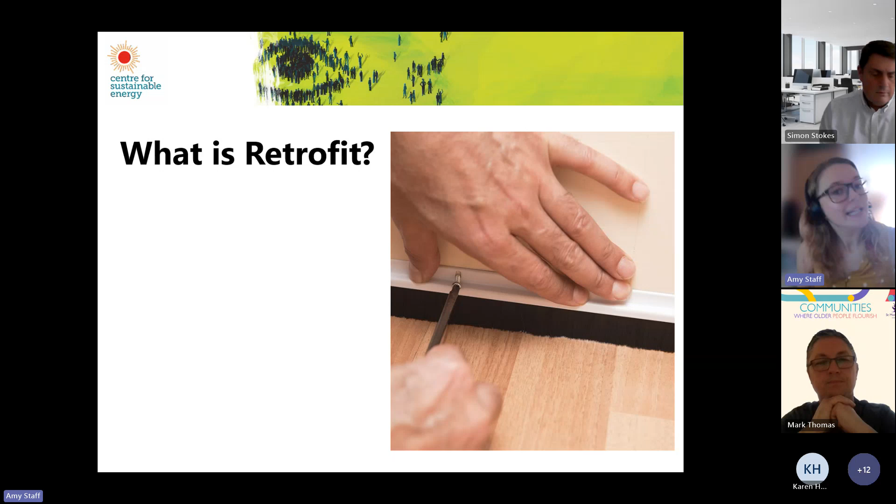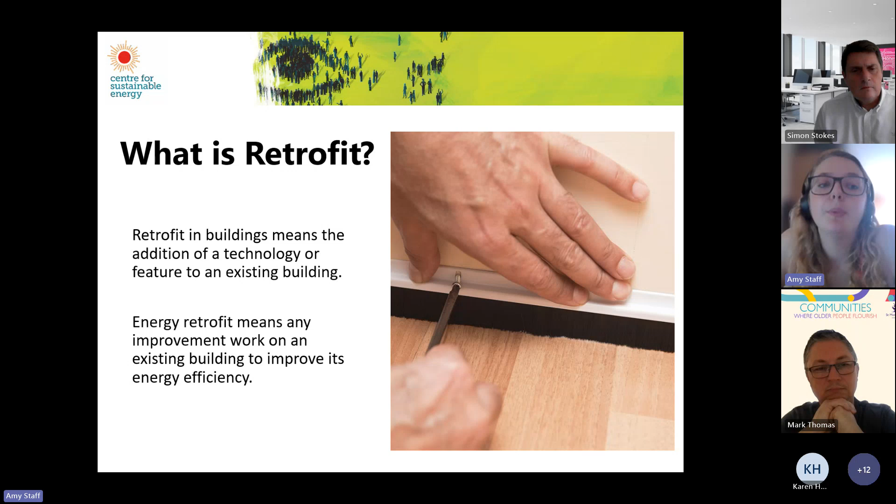And then we've got the local and community empowerment team, which is where I work. And that covers the engagement side of things. So we work with schools, local authorities and communities to support them to take action around community energy, fuel poverty and retrofit, which is what I'm going to be talking to you about today. So what actually is retrofit? Well, in simple terms, it's the addition of technology or a feature to an existing thing, so fitting something retrospectively. And in terms of buildings, we're typically talking about improvement works to a building's energy efficiency.

So why is it important? Well, the way that we produce and use energy is one of the main causes of climate change. And actually around 40% of our emissions in the UK are linked to the built environment. So the longer that we can keep those buildings in use, the better. We also obviously need to change our reliance on fossil fuels, which produce carbon dioxide, generating more energy from renewable resources. So things like heat pumps and solar panels will help with that.

Retrofit also has a role to play in reducing the impact of the energy crisis. So it can help us use less energy and also save on our fuel bills as well. And then it can also help us undertake that equitable transformation that we need across society. So we're not having people living in cold and damp spaces.

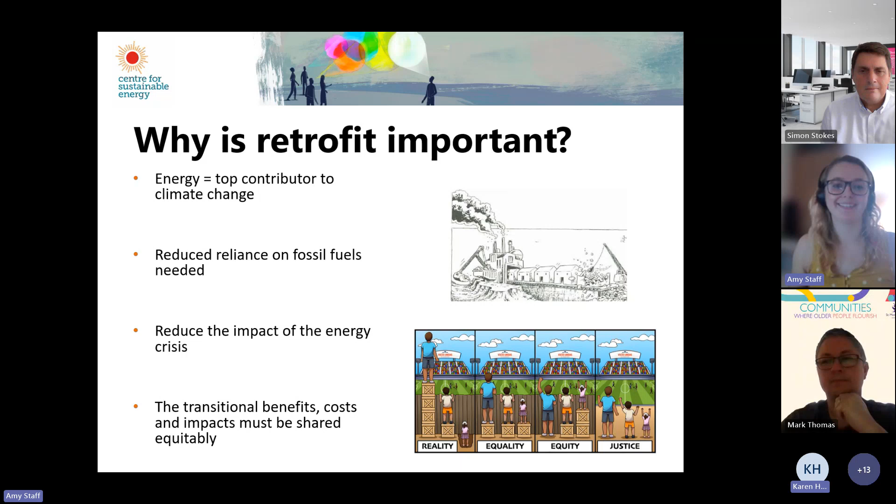Oh, what was that? Sorry? Was there a question? Yeah, no, I think somebody had their mic on. Oh, sorry. If everybody could remain on mute, that would be really helpful. Thank you. Great, thank you.

Lovely. And just to zoom in a little bit onto social care. So why is retrofit important in social care? Well, a significant portion of things like care homes in the UK are older buildings. And many of these facilities were originally built for other purposes, and they've then been converted into care facilities. And whilst having an older building doesn't necessarily mean it's bad, there's a little bit of a postcode lottery, which will mean that the condition of the buildings will vary quite a lot.

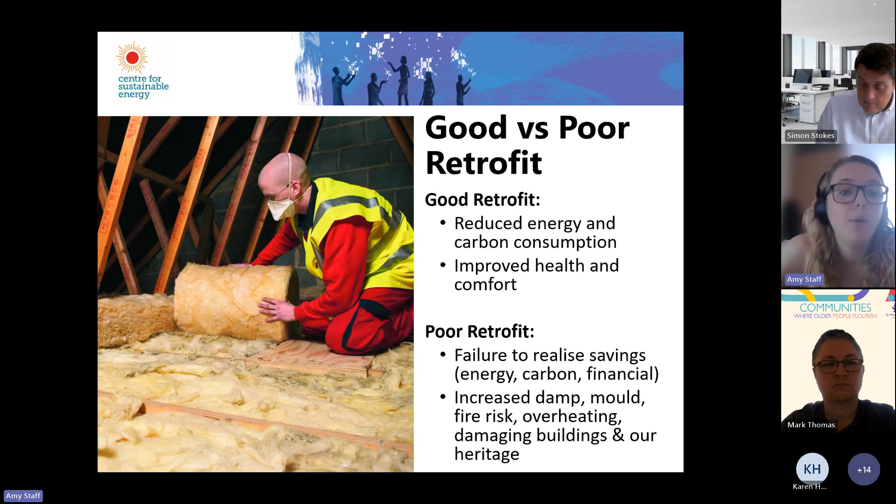However, not all retrofit was created equal. A good retrofit will reduce energy and carbon consumption and improve the health and comfort of its occupants. Whereas if it's not been done correctly, it can cause issues like mold growth, as well as maybe not reaching those financial, carbon and energy savings. This is just an example of a poor retrofit here from a government funded scheme, unfortunately.

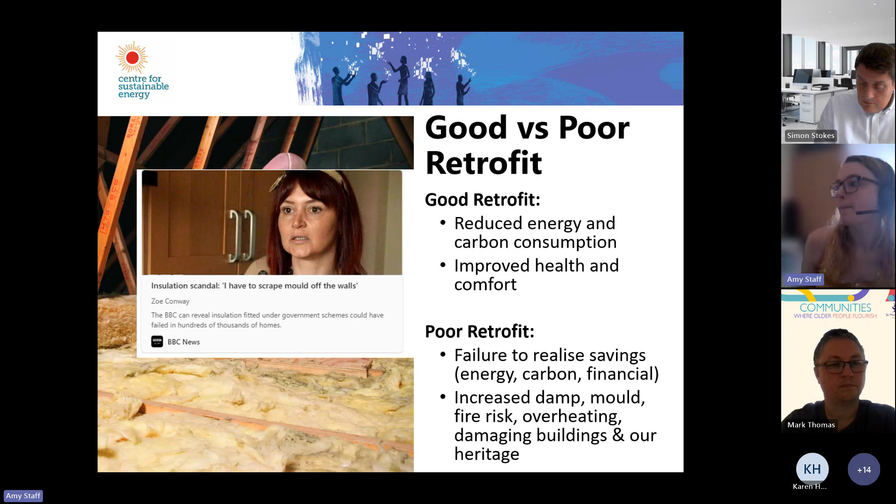So just to rattle through some retrofit principles, we cover these in all of our trainings. I do apologise in advance for the amount of information I'm about to hit you with, but hopefully you'll be able to watch it back. I just wanted to introduce you to some of the key concepts. So first up, we have do no harm. This means not jumping in and adding things to your property before you understand how it works. And it can also mean removing things that might have been added where it maybe wasn't appropriate to do that.

Next up, we have repair and maintenance. Simply maintaining your buildings is a really key way to increase both your comfort and the fuel efficiency of your building, because you're giving your building the chance to work as effectively as possible. A properly maintained property can actually save you up to 40% in energy consumption. So it's a simple thing, often overlooked, but really important to get right.

Moving on to the energy hierarchy. This is a principle where we promote changing energy behaviours first to reduce your energy demand where it's possible, before undertaking changes to the building and your space and water heating, and then focusing on energy generation last of all.

Moving on to the whole building approach. This is just an appreciation of how your building works as a system. So it's best not to focus on an individual element or a room, because anything you do will change how heat and moisture moves around the space.

Looking at assessments and monitoring. This is just an understanding that every building is different. Just to give an example, even two buildings on a housing estate built at the same time, if they are owned by an elderly couple and by a family with 3 children, those buildings will be different because they'll be used in very different ways.

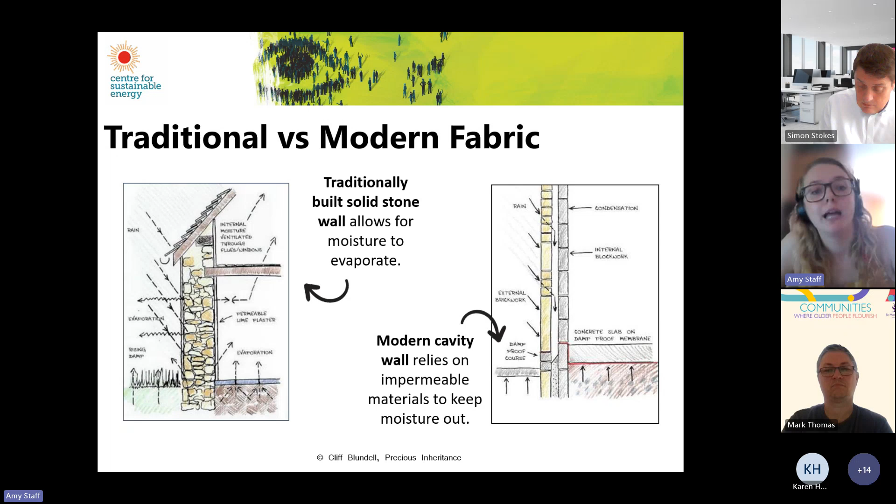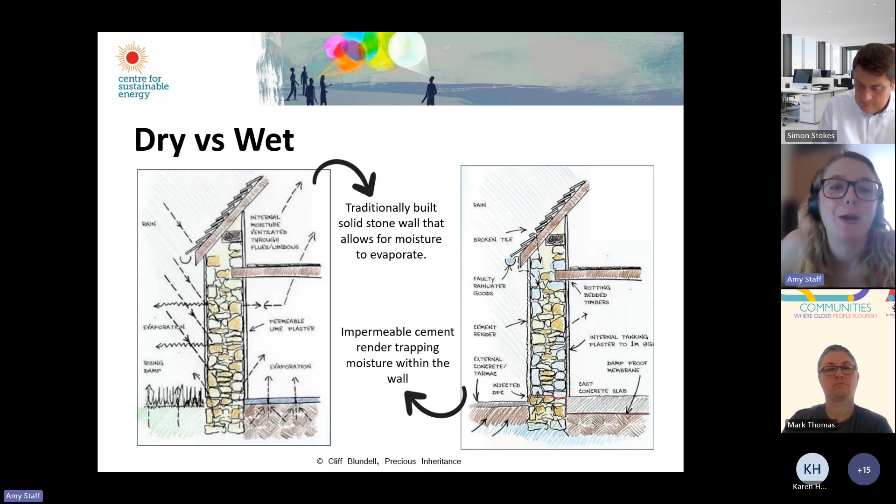So what's happening in this instance is the guttering is actually leaking backwards into the wall, and then once it's in, it can't get out. So it's actually starting to rot the timbers in the roof. So again, just to emphasize, it's really important to understand how your building works before going in with any retrofit measures. So that's the theory out of the way.

Where do we start in terms of action? Well, we'd always recommend starting with a building survey, so you can better understand how your building works, what conditions it's in, and what sort of things might be appropriate for it. So at the Centre for Sustainable Energy, we've developed a DIY survey that you can use for this. I've linked it on the slides here, so you can go away and have a play with it afterwards if you're so inclined.

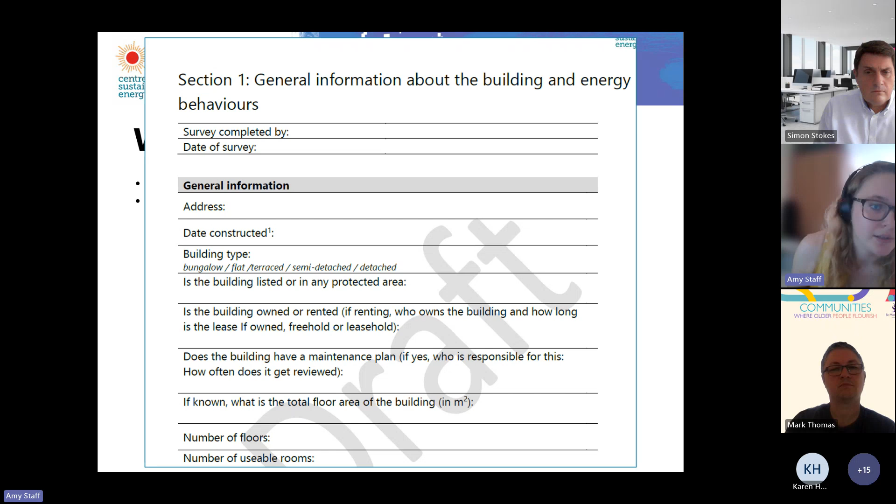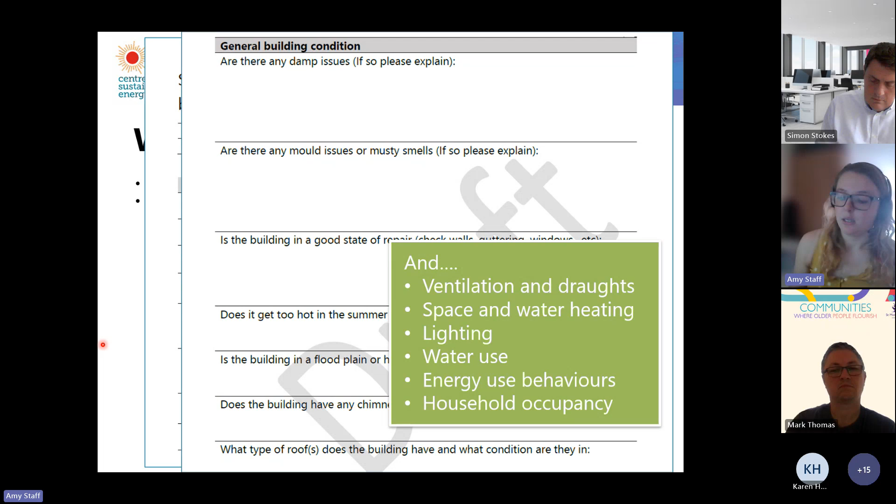Some of the questions you might not know the answers to, some of them you will. So things like, is your building listed? And then it asks lots of simple questions, like, are there any damp issues? Is it too hot in summer? And then we go through several pages looking at, for instance, what condition are the doors and windows in? Are you using halogen light bulbs? How is the building used? That kind of thing.

And I just want to run quickly through a little case study. This was an example done by my colleague, Steve. He's our retrofit projects manager, and he's spent around 20 years in construction, so he's a lot more knowledgeable than I am. He did a survey for the James Hopkins Trust, which is a respite care facility for children in Gloucester, so not too far from here. The building's actually on the newer side. It was built in 2002 with an extension in 2015.

So just to go through a few pictures, which I will get my laser pointer out to show you. This picture on the left-hand side shows a gutter that is clean but leaking, which is causing damp issues on the inside. And then this picture on the right here shows the Velux window, and the seal isn't functional, so that's also creating damp problems as well.

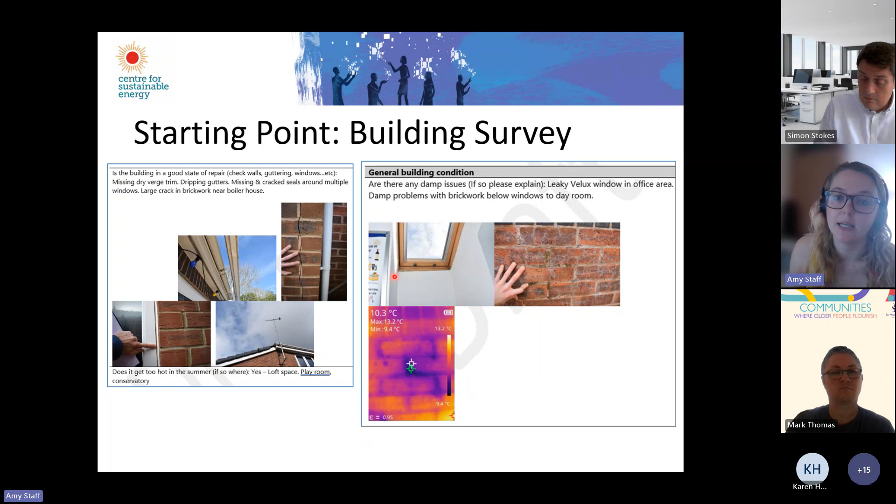Next up, we've got some images taken with a thermal imaging camera. These are used to detect where heat is being lost. We're looking for the purpley bluey areas; those are the colder spots. So here, where my laser is, this is where there's a gap in the loft insulation. Quite a common thing that we see, potentially if you've had lights put in and an electrician has shoved the insulation out of the way and hasn't put it back. That will then create a cold spot, so something that is quite easily remediable.

And this, interestingly, was actually on their extension. There was no insulation in this bit at all, which I thought was quite interesting. And then just another little bit. Hopefully this image on the right-hand side doesn't look too scary. This involves asking some of the building occupants what they think of the building. So does the building feel fresh or is it quite stuffy? That kind of thing.

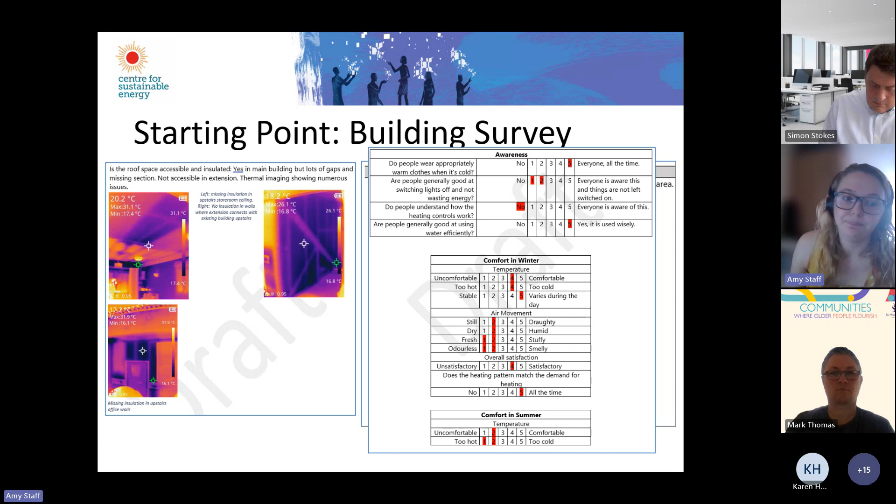And then at the end, there's a place on the survey for you to input different actions. So Steve's written all of this: with the gutters, look at having those fixed, have a look at the damp brick and get a professional in to look at that, fill in gaps in the insulation and reseal the window. So I just want to reiterate again the importance of maintenance, and it doesn't need to be big, shiny, really expensive things to do.

Right, so we've done our survey, we've done our maintenance, and now we can look at appropriate retrofit measures and their costs. So things like insulation and energy generation are typically high to medium cost, whereas things like draft proofing are still really impactful but lower down the scale. So there's a lot of different options here for people.

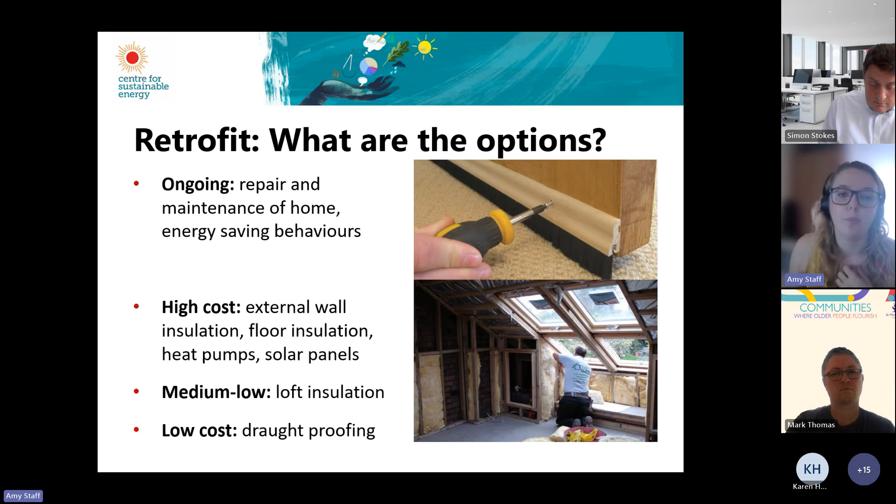So just rattling through, talking about some insulation. It's typically added to lofts, walls and floors. And just to reiterate again that insulation does fundamentally change the way heat and moisture moves through your building. And importantly, adding insulation doesn't solve damp problems. Trapped moisture in the wall is still trapped moisture, and that needs to be addressed first.

And it's important to say as well that some places are easier and less risky than others. So as I mentioned before, making sure that it's consistent around loft light fittings, and also ensuring ventilation is maintained can make it a little bit tricky sometimes. And it's actually, contrary to maybe popular belief, better to do a thinner layer of insulation but make sure that it's consistent, rather than having really thick patches in some places and nothing in others, because it will create those cold spots, which is where you can then get mold issues.

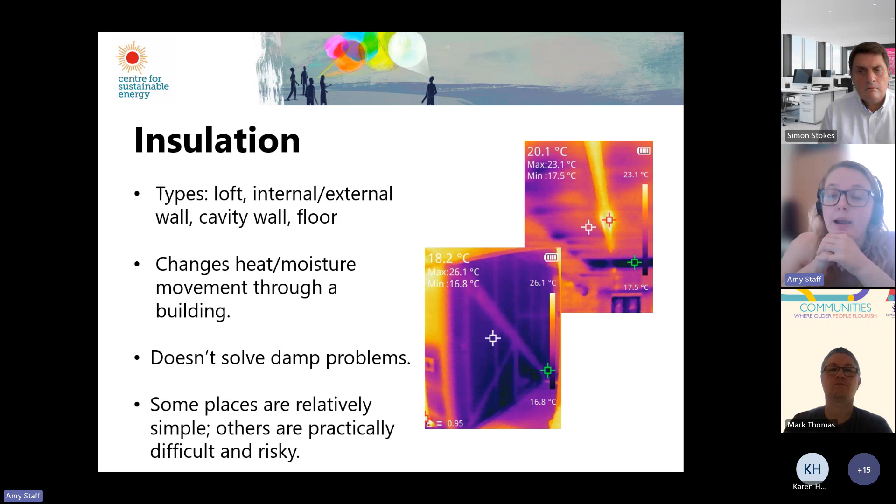But basically, if someone that has cavity wall insulation lives in that area, it means that if water gets through that first layer of brick and into the cavity, and that cavity is filled, it'll get wet and it will stay wet, which will cause damp problems. And a damp wall is a cold one. It will often draw heat out of the building, in fact.

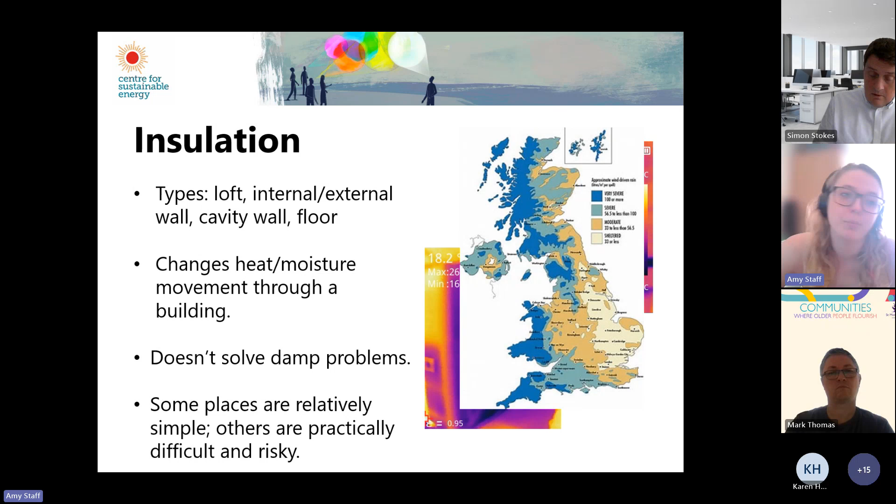And just a quick note about insulating floors. We don't tend to recommend this unless you're doing major works anyway, because it's really disruptive. Things like a thermal underlay under a carpet are a lot less disruptive, and it's removable if you ever need to pull it up for whatever reason.

Moving on to windows and doors. How well windows are fitted really can impact their thermal performance. Drafts can make a house or a building feel a lot colder even if it isn't, and are responsible for around 15% of heat loss. So again, they can have a really big impact.

So things like secondary glazing, curtains and draft proofing can really improve thermal comfort, which I'm sure will be really important to all of you, as I know you'll be working with lots of vulnerable people. And you can get DIY draft proofing kits from stores like B&Q. It doesn't have to be super shiny, super expensive.

Looking a little bit outdoors, I appreciate this isn't always practical, but where you can, getting a porch is really one of the best things you can do for reducing heat loss through things like a letterbox, or if you've got your main door where people are coming in and out all the time, it's good to reduce heat loss there.

And just a note about windows as well. Often cheap double glazing doesn't last very long. And once the double glazing is bust, if you like, once the seal's gone, it is effectively single glazing. So it's worth spending the money, but maybe not on triple glazing, because although you do get some increased energy savings, they are so expensive they never pay back the money you spent on them in the first place, or in terms of carbon either.

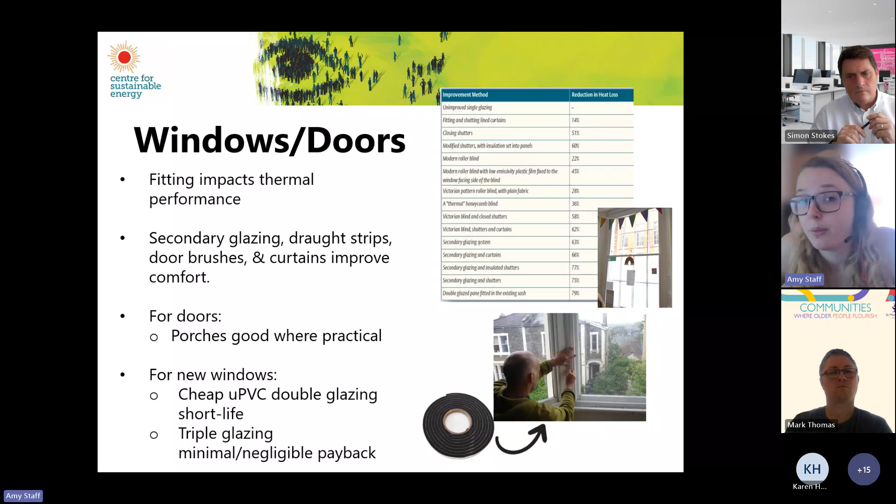And yeah, moving on to energy generation. So although people think heat pumps are new, they've actually been around since the 1800s, and everyone has one already in their home at the back of your fridge. So these work by using a small amount of electricity to heat your home gently for longer, using larger radiators on a lower heat to enhance energy efficiency, rather than turning it on and off as we're used to in the UK. And they do tend to last around 20 years,

so typically 5 to 10 years longer than a gas boiler. And we actually tend to recommend in our retrofit team switching to a heat pump where possible for vulnerable people, because it removes the risk of poor air quality issues that can come with gas boilers, things like the risk of carbon monoxide, etc.

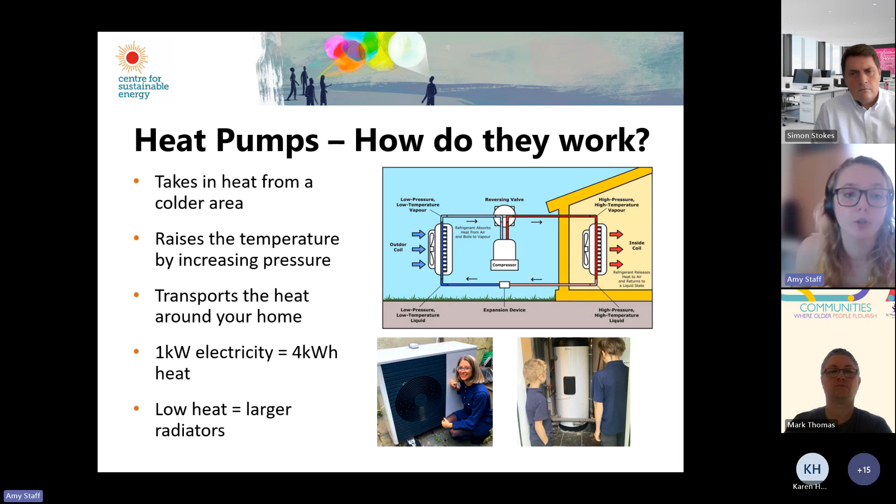And then this will be the last slide, just to talk a little bit about solar. So although it seems like quite a quick and easy thing to do when talking about improving their building and making it more energy efficient, it's really important to think about your circumstances, because other measures might be easier and cheaper to implement. So we've got two different types of solar. We've got solar PV, which is a lot more common, where you get your electricity from the sun. And then solar thermal is where you use the heat to heat your hot water tank.

So in order to maximize those benefits, it's really important to only install what you can use or divert to heat hot water if you've got that solar thermal. Since they got rid of the feed-in tariff, unfortunately, you don't get a lot back from feeding into the grid. And just making sure as well that you're not installing panels where there's shading from other buildings or trees.

And we've actually just launched a free new tool called Solar Wizard, which I've linked on the slides here for you. It uses your postcode to explore the solar potential of your building, and shows you how much money you could save as well. There's also another little video here, which you can watch back afterwards, which goes through the tool in a bit more detail. It's not just for domestic properties, it's also for commercial ones as well. So do check that out.

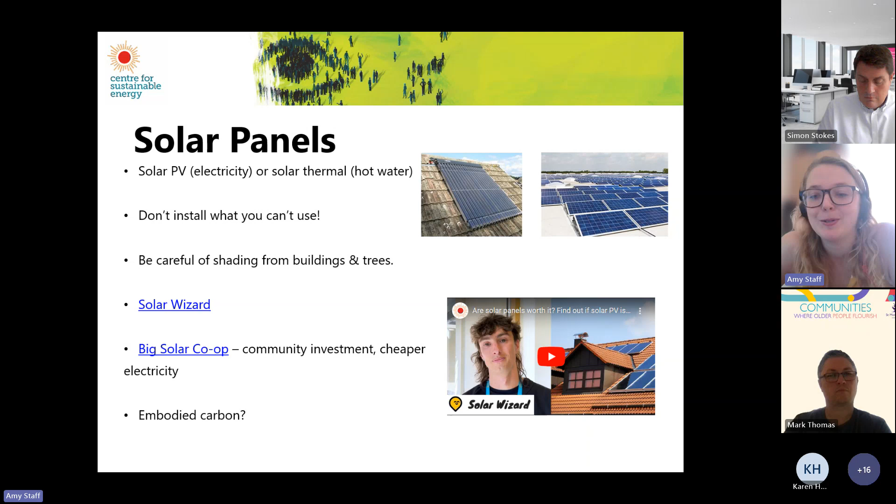So just to summarise: start with the survey, do your maintenance before your measures, and not all measures need to be all singing, all dancing.

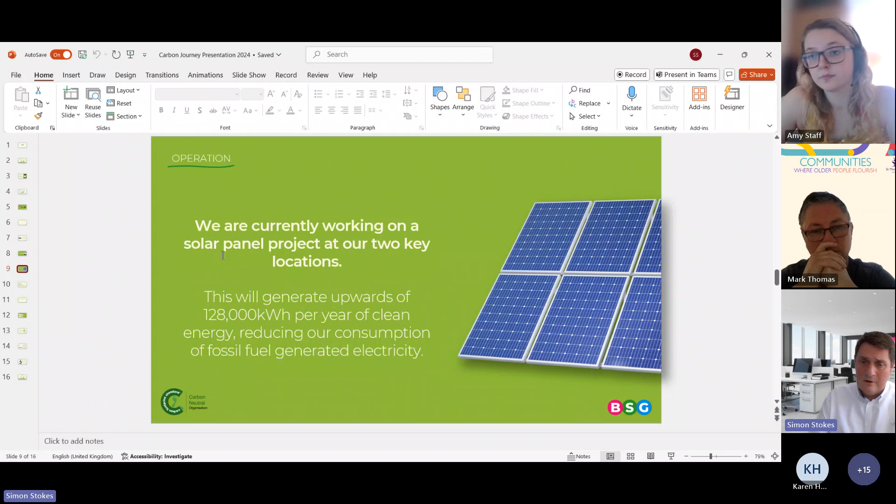Talking earlier about getting our employees to buy into this whole process, we encourage regular team meetings to get together and come up with any ideas that will have an environmental impact on the way we do business. And it can be really small things, but they all add up.

We've implemented a cycle to work scheme where a lot of people that live within close proximity to our office are now encouraged to ride a bike to work. We've got incentives in place which help fund bicycles and all the safety wear to go with that. And we've got a safe covered shelter outside where the bicycles are safe during the day. So that has an impact. It's less of those short journeys.

We've got a car share initiative as well, where we help with the cost if we're encouraging people to share a car to come to work. Even things like, and this was brought up by one of our employees, using reusable steel water bottles rather than single-use plastic. So we've all got our own, well, they are branded, so it's kind of a sales pitch, our own branded steel water bottles and various other initiatives.

Biodegradable packaging, we try and use that wherever possible. Recycling of all our cardboard, plastics and waste. We've got low energy lighting all around the buildings. Light sensors in the warehouse, so the lights only come on when there's any activity in that area, and the rest of the time those lights are off. In our print production process, we're using solvent-free inks now. We're making sure that all the paper we use is FSC accredited.

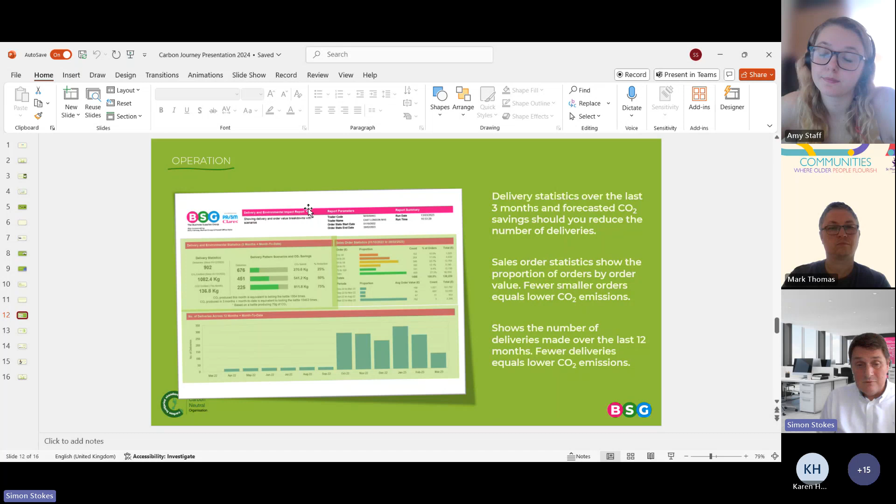And again, that's worked really well with local authorities. It's helping drive that efficiency through, and because we're providing data and reports on a regular basis, that's all auditable. It all ticks a box for them, so they've got another process that they followed, which helps towards their green credentials as well.

And on a product level, within our product range there are a load of products which are far more environmentally friendly. And again, we try and push our customers down that road now. There used to be a real disparity in price. That pricing is getting closer and closer now. It's far easier from a commercial point of view for customers to make the decision to move to a greener product now, because the price disparity is closer than it used to be.

I mean, 10, 15 years ago, if you wanted to buy green, it would cost you money to do that. That is less the case now, because I think all the manufacturers are realising if they don't have green options, then they're probably not going to sell their products going forward, or in any volume.

This just really backs up what I was saying about the environmental products. When customers go to order online, they can select a filter on there which gives them a more eco-friendly option as opposed to perhaps a market-leading product. But then we're empowering the customers to do that, and we back that up with the eco reports that we provide.

And green audits, we offer those to new customers, whereas if they're buying a raft of products at the moment, we can go in and give them advice on the impact that we could have on their current spending by buying a more environmentally sound alternative.

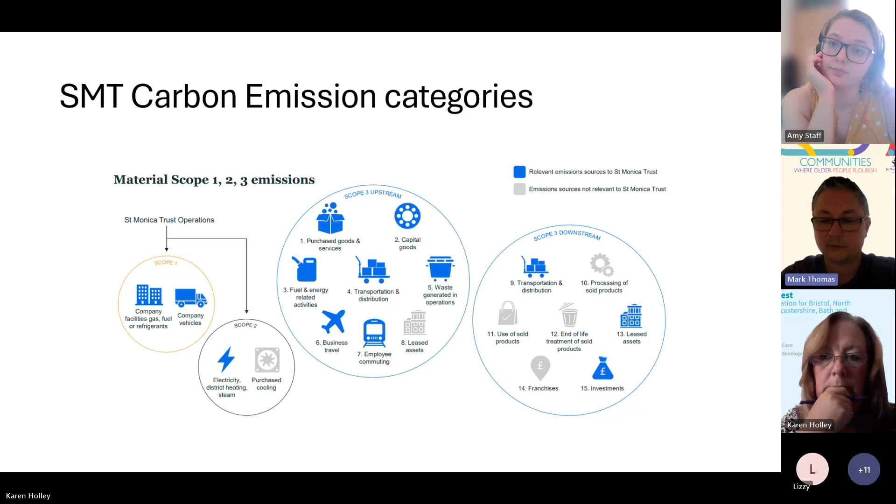Leased assets for us, absolutely massive, because we've got loads and loads of retirement flats that are either sold on a lease purchase basis or are rented either via a social rent or privately rented. And then something that some charities will have is that we have a large endowment fund, which is worth around £300 million. It's invested in commercial assets like farms and commercial buildings, and then a lot of investment funds, and that was a real challenge for us. Karen, have the next slide, please.

And then, as I've touched upon, downstream leased assets is a biggie for us. And then our investments is massive. But because our endowment fund is looked after externally, that's not something that I need to get involved in on a day-to-day basis. The people that look after the endowment will have that as their challenge to deal with over the next 26 years.

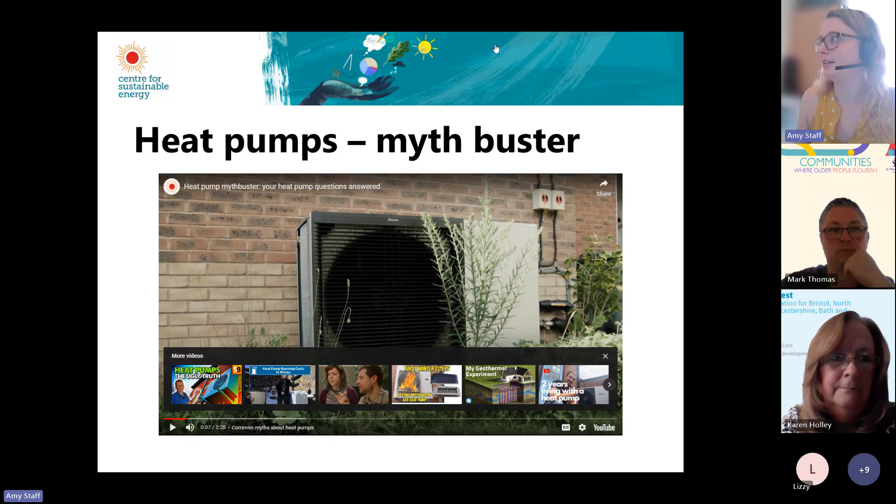Right. And there's the moment of truth. Can you hear that? Did you hear it for a second there? I heard a little noise, but I can't hear anything now. Oh, I've paused it now. You can hear the sound, okay? No. Okay. In that case, I might stop sharing. I think there's something you have to press at the bottom. Sound. Yeah. Could I send you the YouTube link and then you play it instead? I'll tell you what, it's included in the slides, isn't it? And the slides will go out with the recording, so people can go and have a look at it afterwards. Yeah, sorry about that. Don't worry, it's okay. I'll put them in the chat.